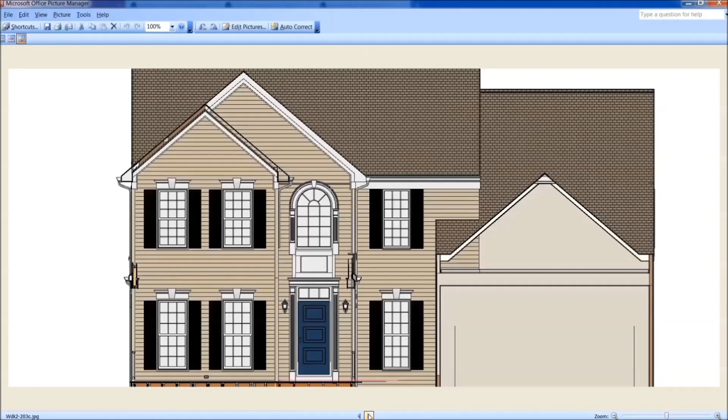So the idea will be, ideally these fluted pieces are recut so that those flutes end prior to this plinth. But in any event, that plinth is moved up like that, and then our roof is going to be occupying in here. But first, when I built that beam for the roof, I keep the beam inside these corner boards, these plastic corner boards here, about an inch inside those. So the corner board continues on and dies against the bottom of this little 1-inch soffit or whatever it is that carries the gutter over to that rear downspout.

Now this is this traditional box beam framing with the main members in here, and this is regular framing. I realize out there that's probably going to be just an aluminum clad box without this sort of thing going on here, so that's maintenance free aluminum. And then there's a J channel right around that and J channel around the ceiling up here.

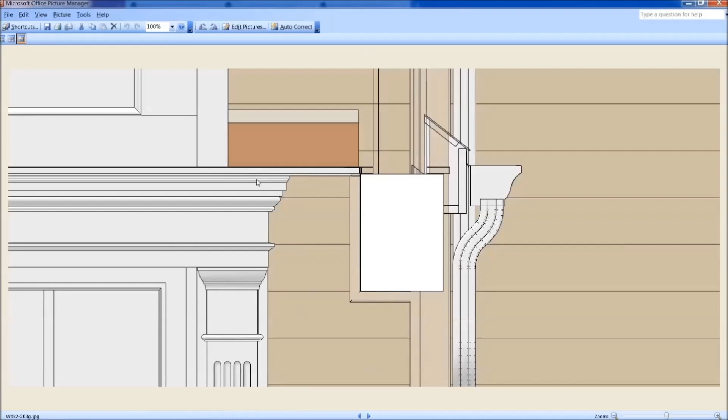But in this structure here, we're going to keep our ceiling to the top of that doorway right there. In that other place, the ceiling had to be built down here. So we have a lot more room to work with in terms of height here. And that is why I automatically called out finished 8-inch columns, 7.5 or 8-inch columns, and 7.5 or 8-inch beams here. The beams die inside the porch there.

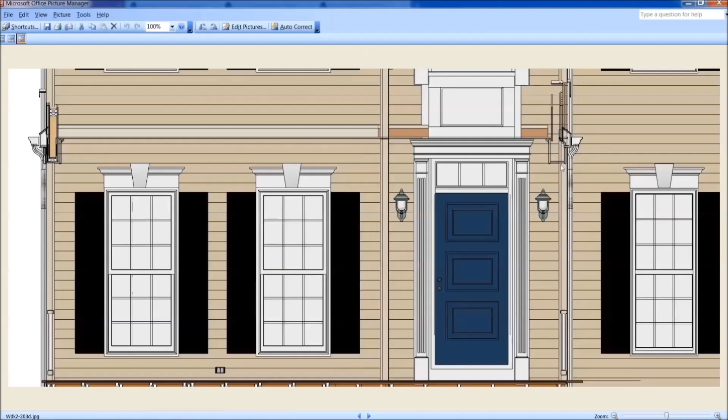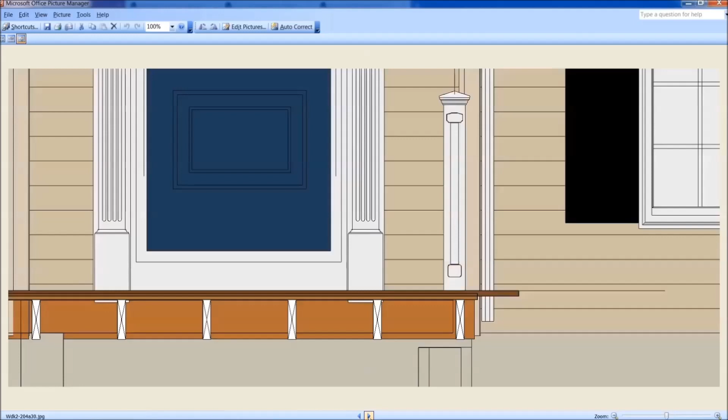These railings down here, though, this is something different. Those are not going to be able to be centered on those corner locks because they're going to be outside the columns here. And so finally, before it was all said and done, I just gave up and put a newel post at that end, which made the most sense, and I should have gone to that right away. But that's what I did there.

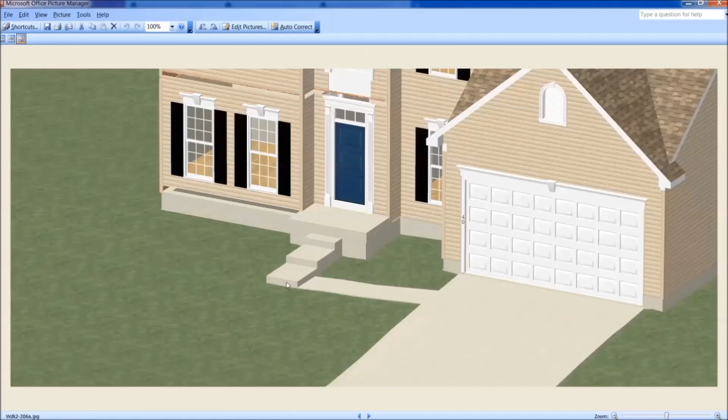Now here is something else to think about or to know about. This is the existing porch slab and its sidewalks, and I didn't take a reading with a level to see how much this fell, but this should be within a couple inches. But when you build the new porch, that's the new porch according to what we have right now, built out over, and you can see that we're going to need some more stairs going down, and this sidewalk's going to have to drift down here quite a bit, like this.

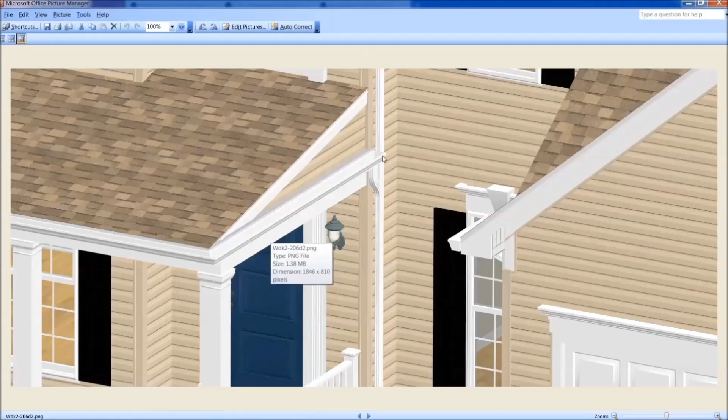Next, I had drawn this like this on the last plan, but CJ did something different over there, and it makes more sense than all this rigmarole here. And that is just to have this board really carrying this gutter, and this is just drip edge here. However, I would keep this triangle piece in siding just for the separation that I think is kind of necessary. It looks better in the siding. You'll have some that you take off from behind this roof. So that's how I would do that on both sides. On this side here, same, I had that thing there, and we'll just go to something simple like that.

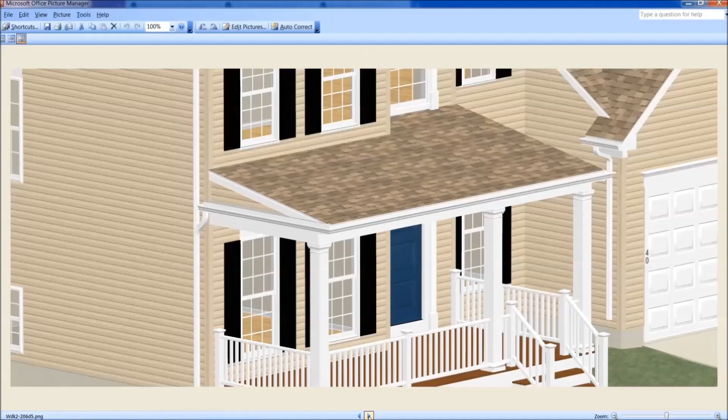And also, I'm going to go back here, a couple of different things real quick. I don't know if you're going to do this sort of thing at this house here, which is possible too if you like, but these columns should have some sort of capital, I think, for this sort of house, and probably even more so for the house that we're working on. So I think those should have some sort of capitals, just those plastic ones that you put around and glue up there.

And the same with the base. And for that reason, when you need this base down here, I would have run this floor on out so that you pick up that dark horizontal line. And so that has to be accounted for, and that's why you have to build this fascia board out so that those decking boards can come out and have a good 1-inch margin past the edge of these bases, if the bases were on here.

That is the only improvement I would suggest, and I think that this here, it's a little different, I suppose, but I think it'll look better in the siding to match the existing over here at Pew Court. And so this was the best according to what I measured with, the driveway's not shown here, but according to the topographical information available and what I was able to calculate, this is kind of what it looks like it's going to shape up with.

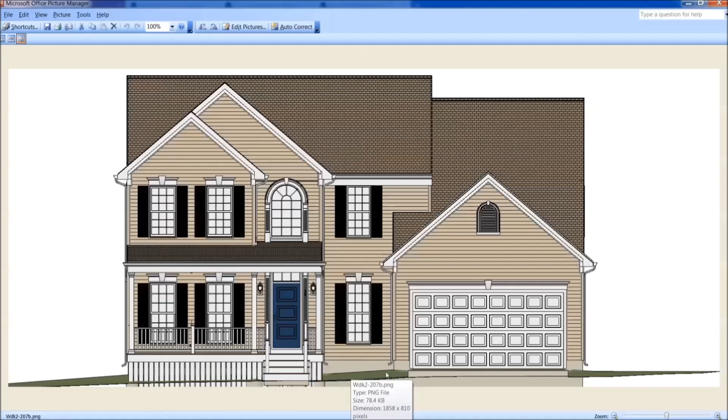Oh, I know. Also, when you're doing all this excavation, you're going to have to put this new sidewalk in. I think it would probably be a wise idea to put in some drain tile from these two downspouts here and get that over here and down slope. Because that's what I would do if it were me, just because it makes good sense.

And then these are the final kind of interpretation of what this would look like, and it's really nice that this has a nice section of space above these window heads. I mean, we didn't have that to work with at Lowndes Court, but we do here. And it's also nice that we don't have that flat section up there. This becomes a much simpler construction. All 2x6s everywhere, really. Ceiling, roof, floor joists. Ceiling could probably actually be 2x4s.

You see the ceiling is vinyl, and so it's run this way because that's only available in like 10 or 12 foot lengths, and there's no way to seam it end to end. If it were wood ceiling, it would run the long ways like this. But this is in keeping with the whole rest of the house, and it's fine. And they have some nice product actually, but I don't know if you should actually depart from what is on these soffits up here, frankly.

And this is where you can really see this looks much better colored like this rather than if this were all white. From this side you don't really even have that much exposure because of the trees and so forth. But from this side here, this will definitely look better in siding. And I did carry the corner board. I didn't try to have it come out and be one piece with this. I had the corner board come down and separate that from this, and I thought that was the best way to live with that.

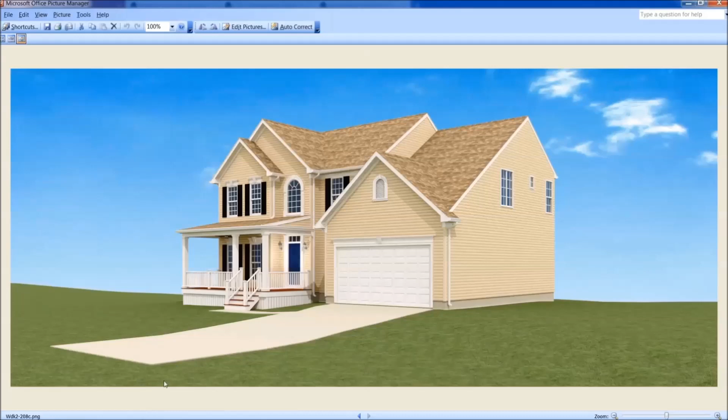Thank you. Okay, so after that first 10 minutes of this film, I began to put the construction drawings together, and I noticed several things that were going to have to be addressed or corrected. And so I made a few slides along the way, and I'll try to share this with you as quickly as I can so that it's not too boring.

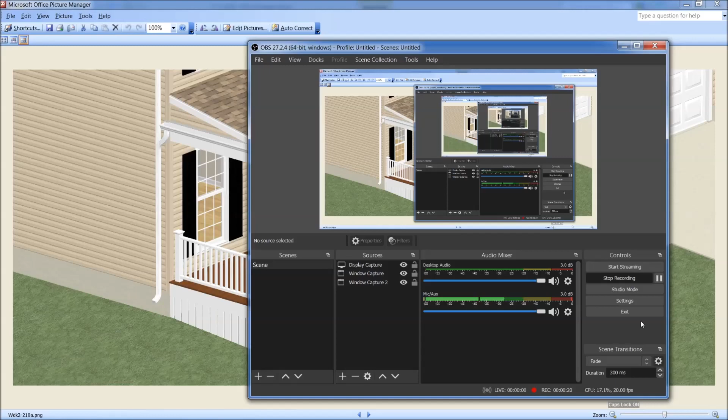But there are quite a few things that I did, and actually the construction drawings themselves, because of a few little things, the corrections that I made, those have been updated to a later dated March 30th set of plans. Some of this has to do with aesthetics, and other parts of it have to do with things that CJ or the builder will want to know.

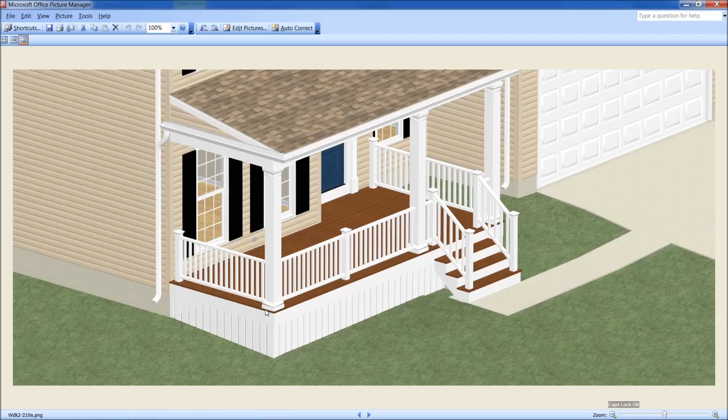So first of all, because I wanted to keep these finished beams inside this corner board like this, and the height of this asks for these 8" columns, which means 8" finished beams. So the railing is centered on those columns. So that requires some build out on these deck edges in order to pick up these bottom bases for these columns.

When I began to put together how we were going to support these stairs, how we're going to hang these, and put this ledger board here, this 2x8, it was going to project in front of, it was even intruding into the 1x10 deck frieze out here. So it was too far forward and it needed to move back. And this plan was like the one on Lowndes Court.

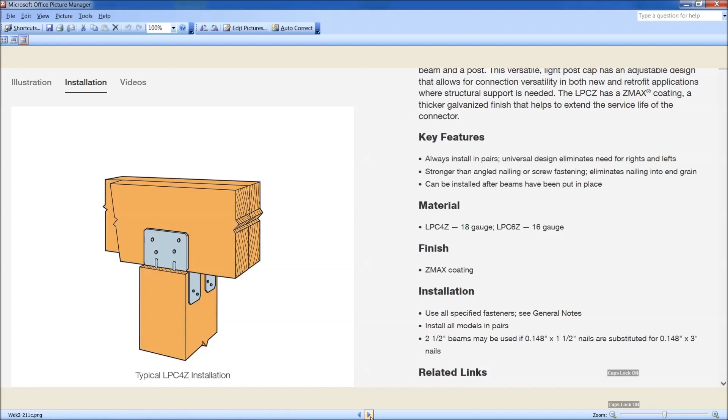And we can't move this column up here; it is centered under beam B at the top, and beam B is dictated by the ceiling height interfacing with that door and the height of the rafters needed up there. So that can't move. So I got rid of those bolts and went to this LPCZ, it'll be a 6Z, to attach. Instead of attaching all these with bolts, we'll be attaching with that LPCZ.

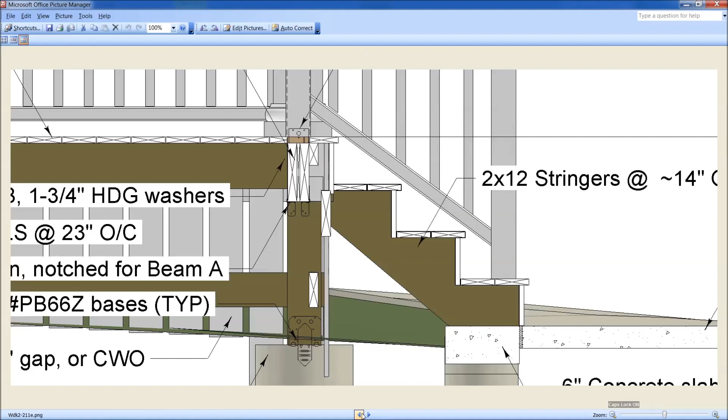And so that enables us to cut these 6x6 columns down to the bottom of this beam A, which are 2x10s. And when we do that, with these connectors you can situate that beam anywhere across the top of this post. So I have moved it to the center, allowing us to put our ledger back here. This is just the bottom frame in case you want to hold up whatever screening you use down there.

And for that LPCZ, you can use this less expensive one. You don't have to use Z-Max. This galvanized is fine for that. And by the way, it's been my experience with almost all of these Simpson parts that they can be had for less money. Here it's $6.02, and I think it was around $8 at Home Depot, from connectorsonly.com, and you just order it and it arrives a couple days later, because it comes right out of the Simpson warehouse in Columbus.

So this is the closest you can get to ordering directly from Simpson. I don't know how Wreckworth's prices compare for hardware, but historically connectorsonly.com has been the one for me. So for 6 of these it was going to be between $36 and $48. And because I was curious how these prices compare, if you had used a bolted connection instead, I added those, and it comes to $43. So if you can get these from Connectors Only, it's going to be less expensive.

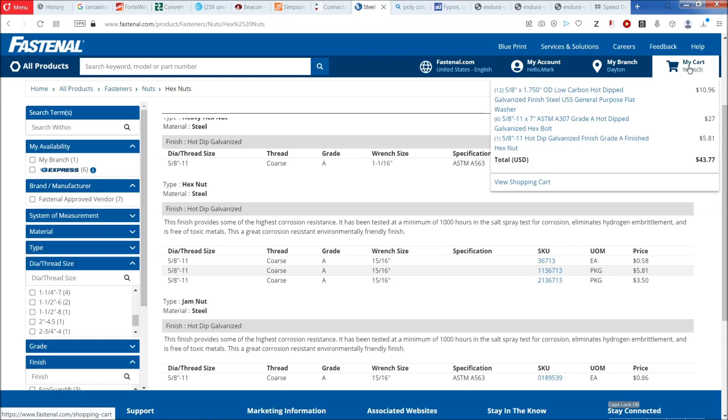I mean, you have to have the nails to hold them in, or screws, or whatever you want to use. But this is going to be a better connection overall, and it's going to be a similar price. But returning to this now, once this happened, I knew that we're going to have blocking up here to hold this up and to hold that frieze board on. And this is how I was looking.

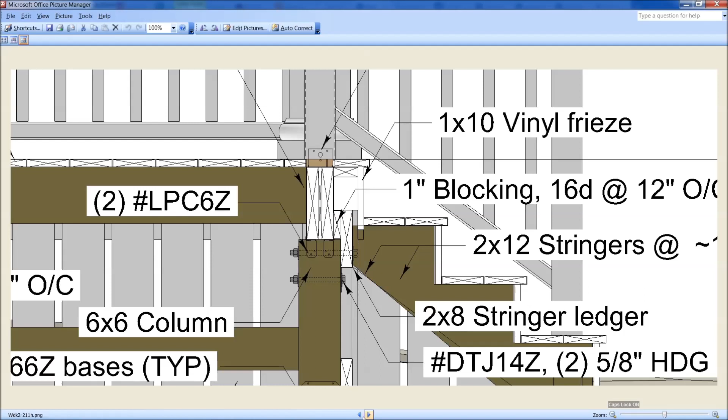So what I did is, this was a 2x8. I switched that to a 2x10 and moved it down so the top of this is to the top of those. And actually you can add another bolt through here. And this uses a Simpson part also. I think it's called a DTJ. It's called out here, but you can't see it. And that assembles with 5/8 machine bolts. So you'll still have to buy six 5/8 machine bolts in the assembly, the nuts and washers, for this ledger board. But this is going to be an easier fix to block this out for these deck edges up here.

And unfortunately, the way it works out, and I suppose a person could horse around with this and make it work, but it works out to 3 3/16, or 3 1/16, right around there, 3. But it's not 3 1/2. And so because I can tell it'll make sense, I will adjust the plans a little further so that this just becomes 2x4 framing here. And that's consistent all the way down across the whole front of that deck.

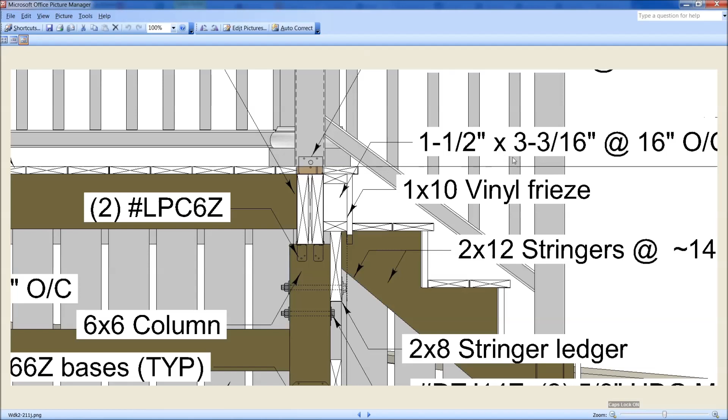In the stair section, it's going to be up a little bit because you've got this higher ledger here. But everywhere else, this will be 1.5 by 3.5. This will be 2x4 framing. And the difference will be that this overhang from the edge of the column base will get 5/16 of an inch wider, which is no big deal. As long as you keep those column bases as I'm showing, which is similar to the products I actually showed you. So I'll adjust that one more time, just because that makes sense. And that's how that'll be framed there, at least it seems to me. That's what should be done.

And there's that ledger, that 2x10. I call it a 2x8. Maybe that's what it is, a 2x8. And it is in blue here. I think it's a 2x10. But then the rest of this, the front end of this here, is shimmed out similarly. This is the ledger in the background, and this is what's happening out there, except this will say 3.5. And on this end here, then you will just adjust.

A couple things to notice. Here's the LPC holding this onto that. And these upper columns on the left and right, the outside edges of those actually align with the outside edges of the 6x6s. And then beam A is cantilevered over here, and you can cantilever it over here as far as you need to pick up this last joist, this 2x10 end joist that will travel back to the house, and you will use one of these concealed hangers to hang it there.

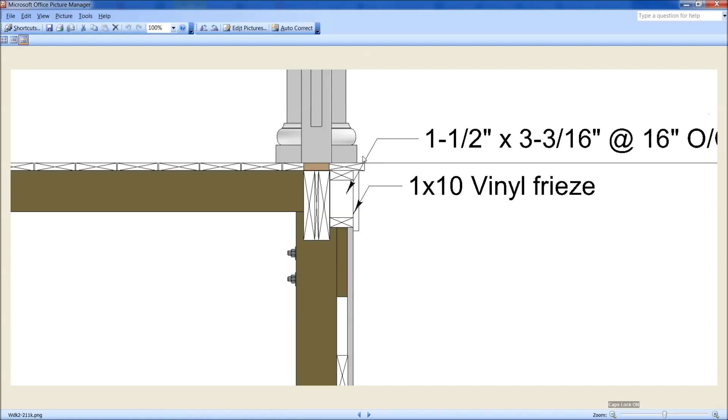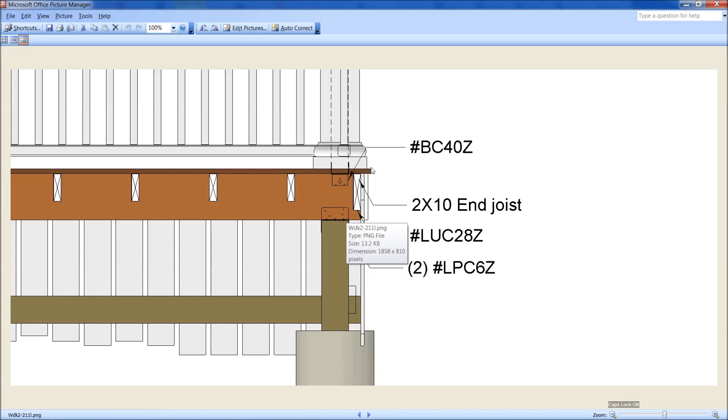Remembering from our other diagram, we're going to have 3.5 in here, and that's going to end up with probably about 1 inch and 5/16 or 1 inch and 5/8 projection from the outside of this. And that should just be measured from the center or whatever, but that is where that extra 5/16 is going to end up at the front end, and that's where it's going to end up back here as well, right up here. And you're just going to project this beam as far as you need to hold that last joist to pick up your 1x10 deck frieze. And it can go as long as you want, really, but obviously all you need is to make those margins equal.

And backing out, and this will probably be in the new plan because I've already drawn it just to demonstrate it. This is looking out from in the porch. Here's the 2x10 stair ledger, and it does require these 6 machine bolts to hold it up, but then that's the end of the road.

That holds up everything except for this slab down here that holds up the bottom. And the important thing to note is that these two end 4x4s here, those line up with the outer edges of these 6x6s. And I mean, if you follow the diagram, if you follow the dimensions of the floor plan, you'll end up with this.

But if there's any confusion, that's what's happening there, is that those are coming down where their edges are aligned with the outside edges of this, and the center column is actually aligned with the center of that. I actually forgot that I added these notes already.

And this is a good situation with these columns cut off, because it allows us to locate these upper columns anywhere along that beam. You might have to be a little bit careful with this situation here, maybe lay out the joists so that they don't interfere with those, or so you don't have to have joist hanger on top of that. But otherwise, that's the way that shapes up from that end.

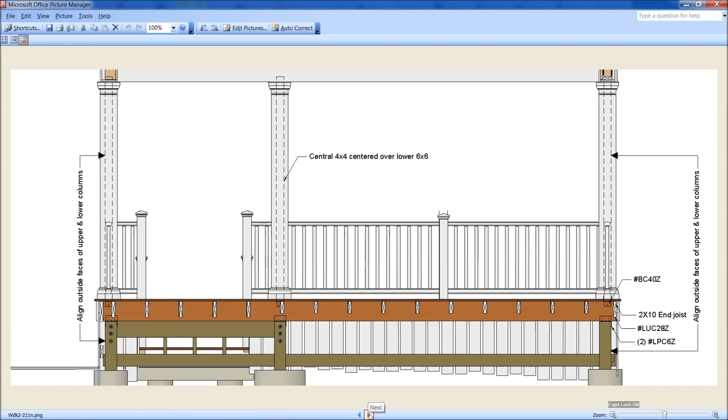And the next thing I had to cover is again a construction thing, and it has to do with demolishing that there. One of the things I'd like to see is this porch to be down just like it is here, at least 6.5 to 7.5 inches down from that threshold. And so I'm pretty sure that this was poured separately from those foundation walls, and it should be able to be demolished off of there pretty easily. I don't think it's all one, because of this projection. I don't think they did that, but I may be wrong.

But in the event I'm right, here it is in section view, and you can see that possibly you might have to notch the bottom of these 2x8s just a little bit, and they shouldn't give you a headache about that. They would almost pass as 2x6s. So if these are just notched a 1/2 inch, if the top of that wall doesn't want to knock off easy, that's what I would do.

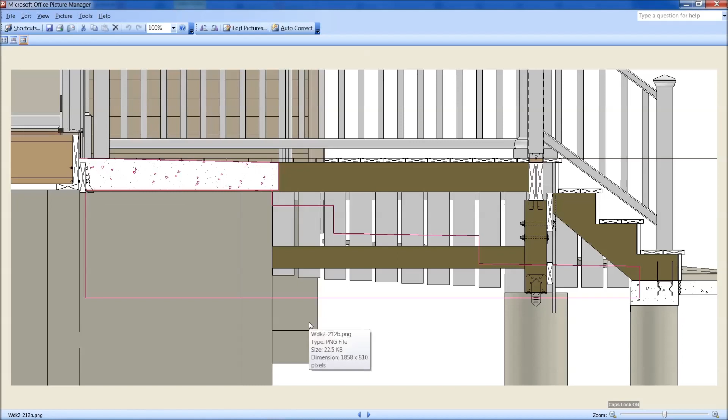I just wouldn't let them contact this wall at all, just notch them up over there, the minimum required. And as long as you have 6 inches up here, those are still going to carry the load. That's a top slab, and that would have to go away to keep this more of a traditional step down onto the porch, and to avoid the rigmarole of the secondary beam in front of that slab, or screwing furring strips to that slab. That just eliminates all of that sort of rigmarole.

And the stair handrail and these guards, those are going to be required if this is any more than 3 risers, and I'm currently showing it as 4. Not that you wouldn't want them even if it were just 3.

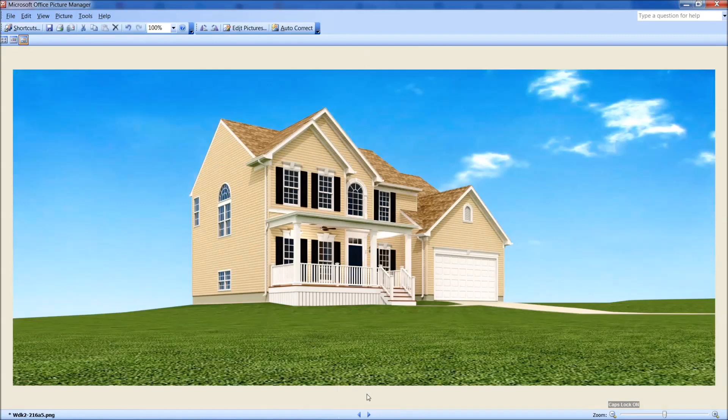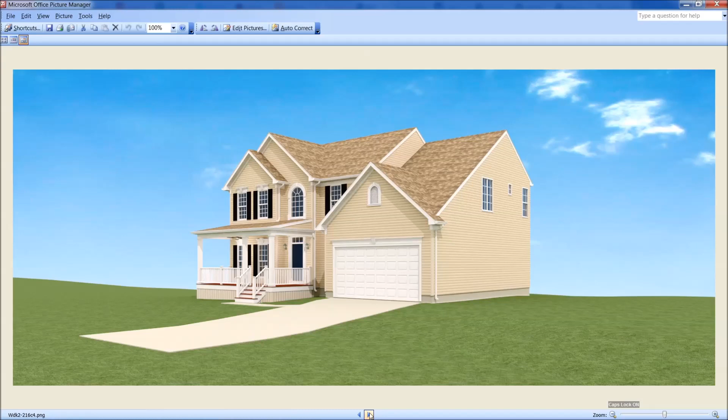And then I shifted the camera a little bit on this. And I definitely didn't care for that, where I changed the color of that bottom. Finally, and I know this has been an exhaustive review, but finally a few things with regard to the aesthetics again.

This beam is shown as clad aluminum here, and that's presumed that that will be the case. That's what's happening everywhere else in the house. This more traditional look had this box beam situation here, and the most elaborate, probably, is where there's a little crown mold inside as well. But this here looks just good to me, and probably is what this house asks for.

I think these capitals and bases will be required for sure. And I noticed that I had forgotten to put these column wraps. You usually get them with some sort of a base, and that should also be included as part of this to make it complete.

If you didn't buy these straight up columns, and these are manufacturer columns, fiberglass reinforced plastic columns, and if you were just going to build those, and I assume you are just going to make those boxes and then clad them with aluminum, you can still get these tops and bottoms if you make those the right dimensions to match these, or have these on site before you box those.

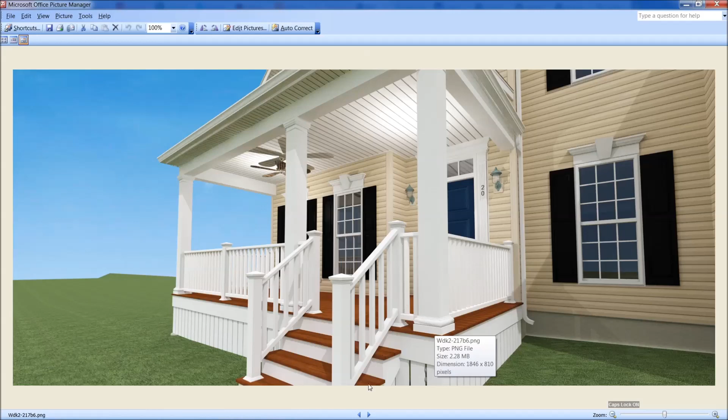They have a variety of these, and I wouldn't use these. These go up under the beam where they don't project over in a traditional fashion like this. So I would stay away from that sort of a thing, and these little chintzy kind of things, and I would either use that or what I'm showing, which is this Tuscan. And you can mix and match these, that's up to you.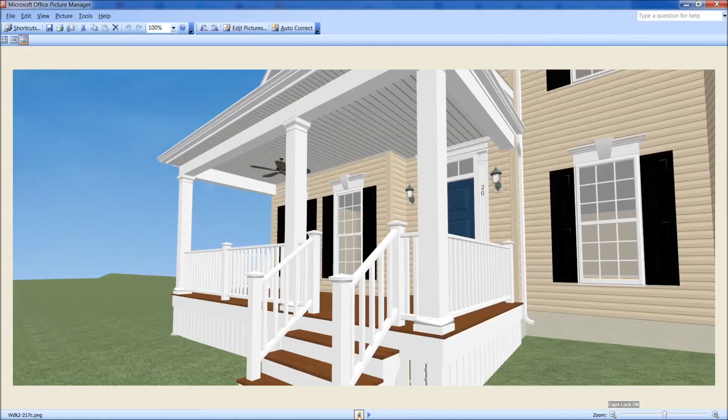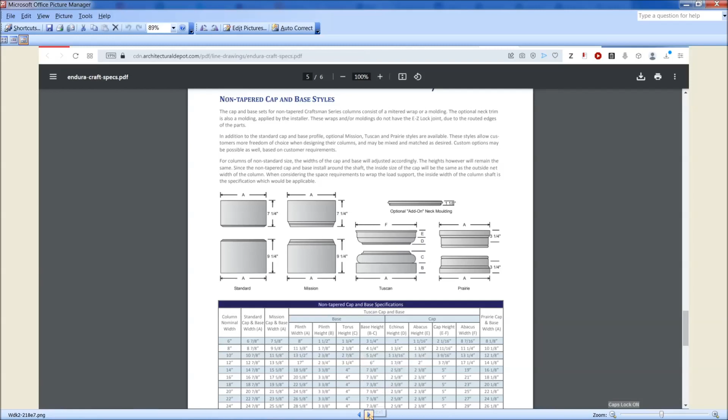And keep in mind, if you just get those two bases, you won't have this neck mold here, which is kind of traditional as well. So you want to make sure that you pick that up as well. And as I said earlier in the film, I'm not sure exactly how this will work out here. If you think you can get away with 3 risers, then you'll have to adjust things accordingly on these stairs by the 10 3/8. Just go back 10 3/8 with everything.

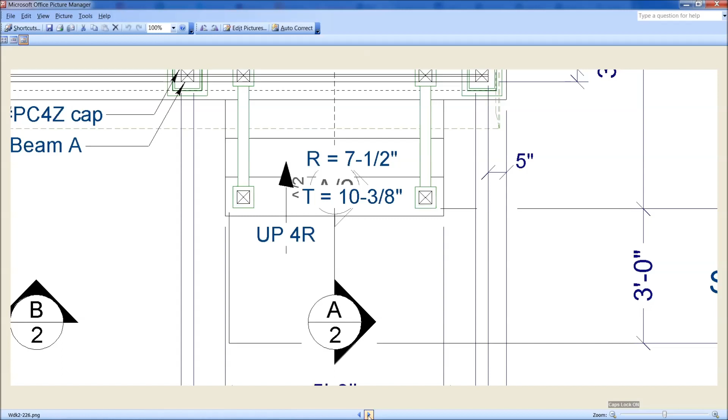And then the last little thing that's just annoyed me is the way I situated those, if you did it this way, where you were using these post bases and having 4x4s come up through there and then using sleeves on them, if you weren't using bolt-on aluminum railings and so forth. I was showing these and located them, and all I've done in the new plan, so that's one little adjustment, is I moved those little things forward to the 3 1/4 inch required, and that makes these even on these corners here. And that apparently finally is the end of that.

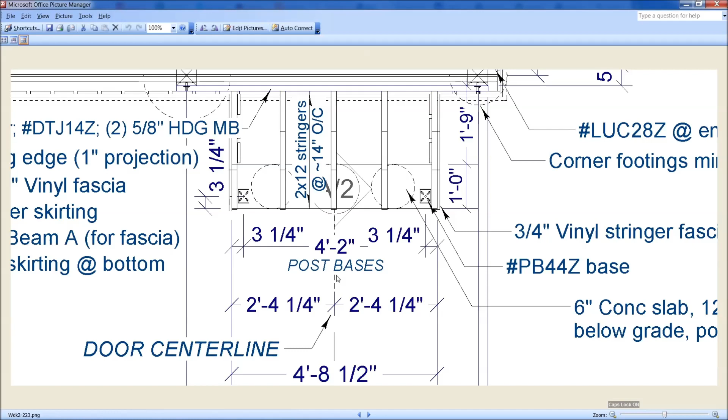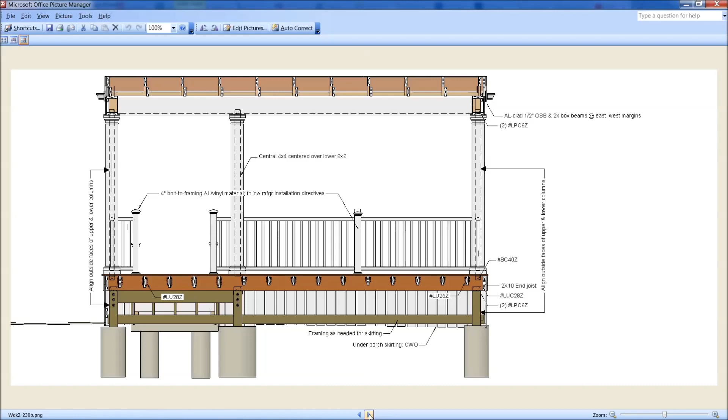Alrighty then, this should be the final permutation. When I started to draw this section looking out from the porch, I recognized that we weren't going to be able to attach the 4x4 posts for these newels, and CJ and I have already had a conversation about this, so that is going to change. Otherwise you would have to have bolt down columns, and these are kind of expensive. So this is what the alternative was, which was drop that column and that beam down, and then bring the joists out over in a more conventional fashion.

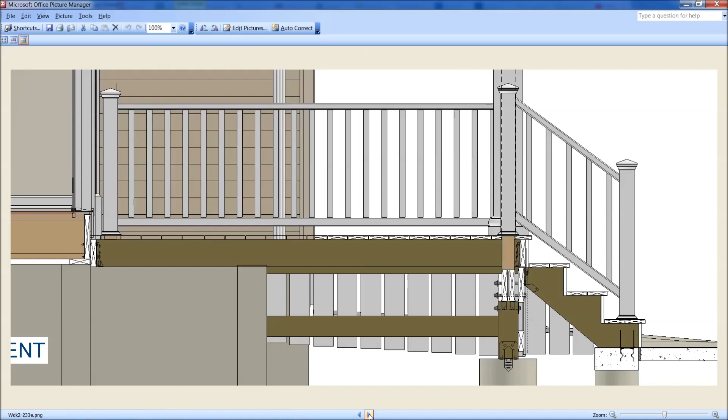You can just nail these joists to that beam with 310s, but then it's how do we hold this? The stringer support changes a little bit. For one thing, now we can frame those posts down into the floor as required and block them in. But in terms of stringer, we're going to just take that same 2x10 stringer header. We're not going to need these Simpson DTJ or DJT connectors, or those bolts, or those hangers for that matter up there. We're not going to need any of that.

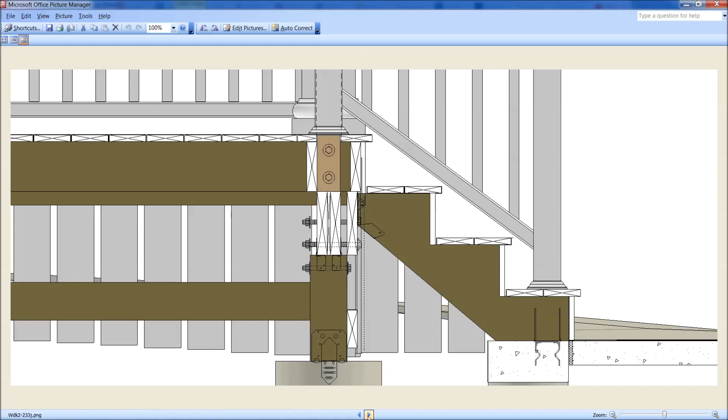And that stringer is going to come up to the top of the column just like the other ones. The column's going to move forward to provide that support. You can see the column is still behind this skirting, but just barely. But now the stringer header moves onto this, and then just pad that out with an extra 2x6, because this leg here where it contacts has to be at least 4 1/8 high. But this one's sitting on top of those columns, so all of this just needs nailed together.

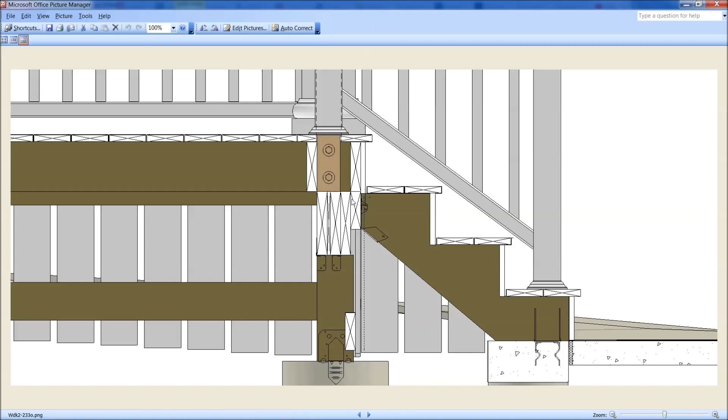And there is the bottom support for that 3/4 inch screening or skirting that comes up and goes behind the 1x10 fascia. So that's that. Sorry about all that.